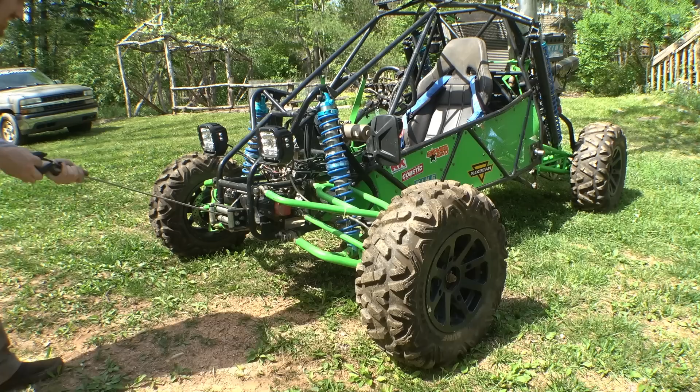Yeah, work smarter, not harder. I'm gonna use the winch to drag this thing out.

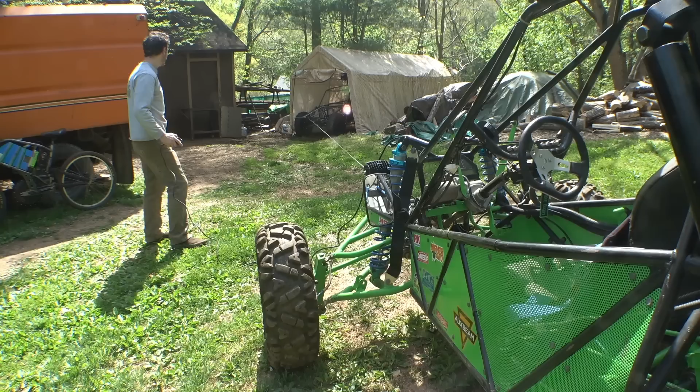Man, look at the size difference between these vehicles. The CBR 1000 isn't that much smaller than the two-seater mini trophy truck. The trophy truck has bigger tires and a bigger frame, but the wheelbase isn't that much bigger than the CBR 1000. I think it's just the bigger tires and bigger frame that make that thing look huge. So finally being able to see these things, not really side by side, but more head to head, I guess.

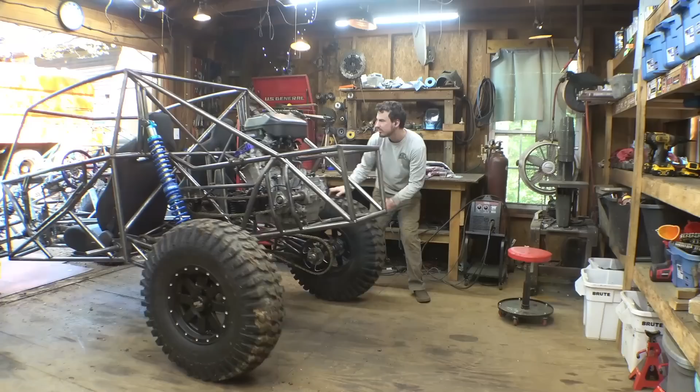Alright, we are finally continuing working on this project. I know we took a little break from this thing for, I think, a little over 2 months. Yeah, we're finally back working on it. Now, I made a list of everything we need to do before we can disassemble this whole frame, weld it all together, then reassemble it and start working on wiring and plumbing and all that fun stuff.

We need to install the radiator, install the bump stops, the dash bar. I want to raise this up a little bit more and move it further forward. Sway bar, secondary sway bar, I'll explain that later. Gas tank, finish cross bracing. I need to add more tubing here and there to strengthen the frame. Dashboard, we need to connect that up. And finish the engine mounts. There's probably a couple other things I'm forgetting.

Now, let's start working on the radiator first and get that installed.

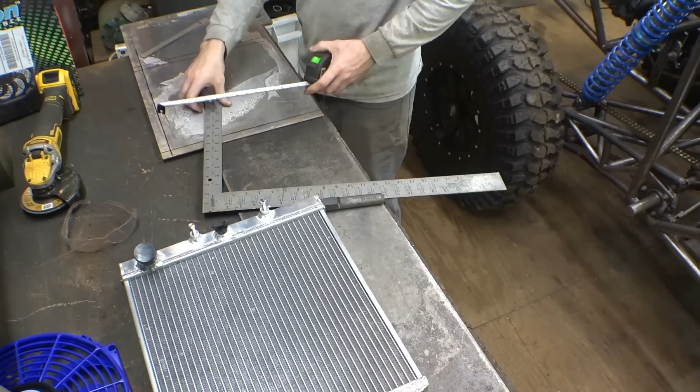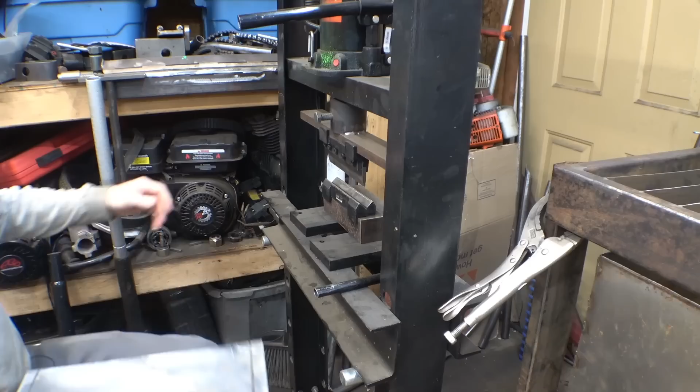Alright, I'm not sure if this is gonna work, but I want to try it. Yeah, it's not that wide, but maybe if I just do it in a couple different sections, maybe I can get this to work.

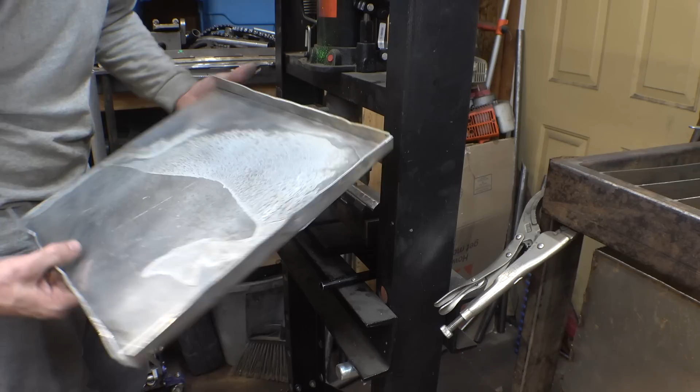Well, it's definitely not the neatest job, but maybe I can clean it up.

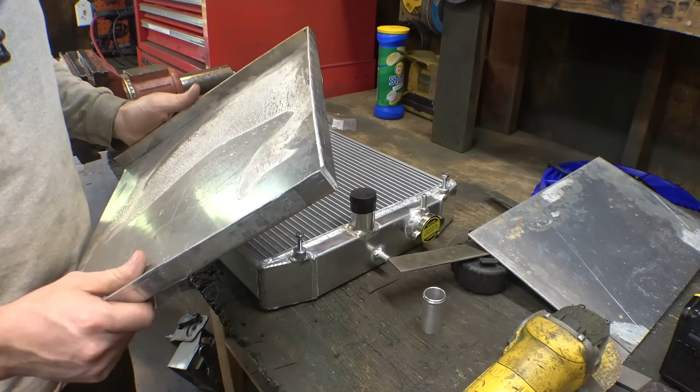So this thing kind of looks like crap. I was able to bend it, but I don't know. I wanted to try and bend it so I didn't have to weld these corners on. Already this piece wasn't big enough to do all 4 corners, so I'm gonna have to weld this side. Also, I made it a little bit too big, my calculations were a little off, and it's about 1/16 of an inch too big on this side.

This side is kind of the worst side, it's really dented in. I'm thinking to fix this maybe I just cut this piece off so I can bring it in just a tiny bit. I already have to weld one side, so I'll just weld 2 sides and get this into shape. Then we got to cut a giant hole in the center of this.

I don't know, part of me just wants to try again and not bend it, just weld it together. Welding is going to be a lot prettier, and it's not gonna have all these ugly, really bad scratch marks on the side. I mean, that looks fun. Should I just start over? It's gonna be on the bottom, so nobody's looking at it, but it just... this looks like crap. Yeah, let's try again, and instead of bending it, I'm just gonna weld it.

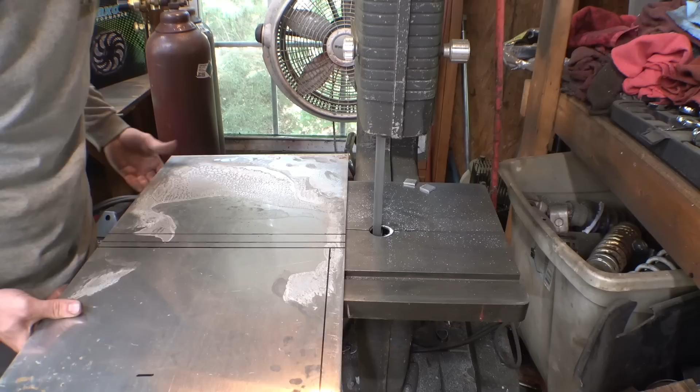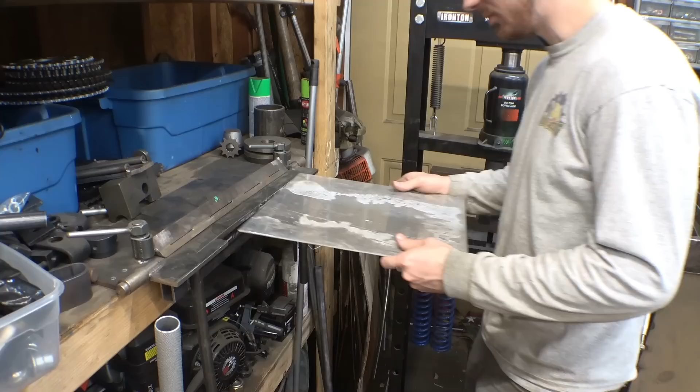Alright, so I scored some lines in here, so hopefully that means I weakened it enough to be able to use this bender that I made that isn't very strong.

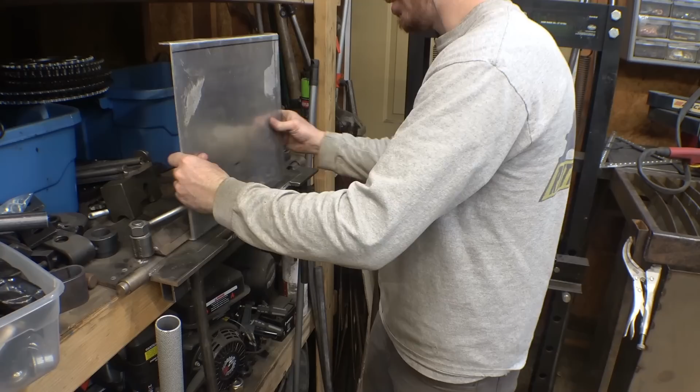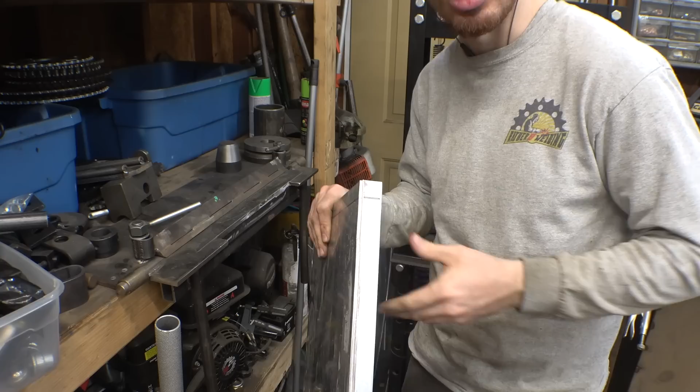Boom! Look at that. I'm still gonna have to weld this because now it's cracked and it's super weak, and any vibration would make this fall off. But it doesn't look too bad.

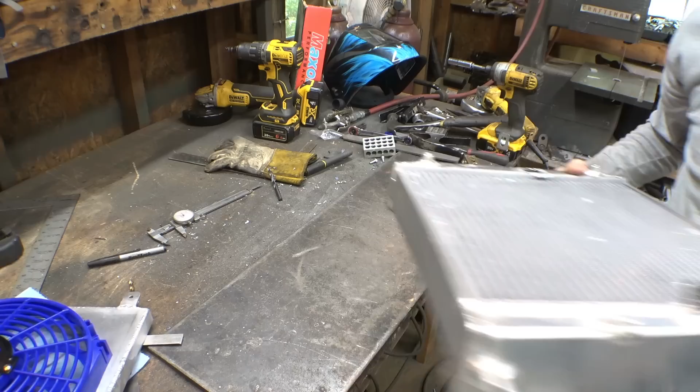Alright, so I had to build a radiator shroud for this. I wanted to try and buy one, but I could not find one that would fit this, that had the holes and the proper spacing, so I decided to make one.

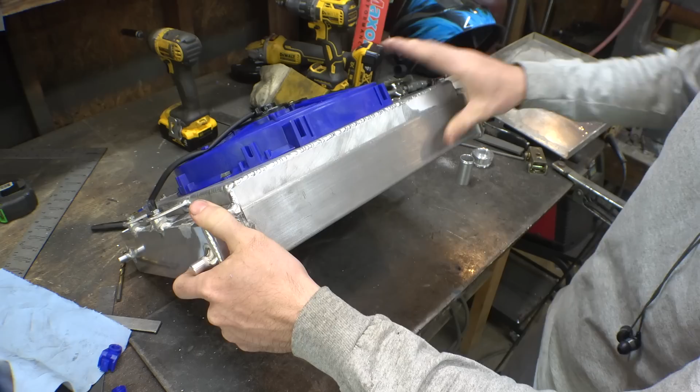Now, look at the girth this thing has. Once we added the shroud and the fan, this thing is really thick, so I'm hoping I can still fit this in the frame now that I added this stuff. Also, this is a triple core radiator, so hopefully we'll have plenty of cooling capacity for this giant engine. I wanted to try and find a really small radiator but still have plenty of cooling capacity, so I found one that is triple core.

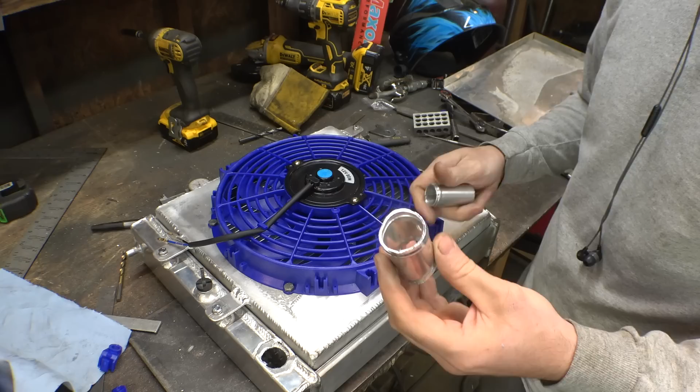Now, yes, I did cut off the original inlet and outlet of this radiator. These are too big, we need to weld on the proper size we need. These are 1 inch, and I believe the original was 1.5 inches, which is too big. Don't need those, we need to weld on the proper size. So once we get this installed in the frame, we'll weld on the new inlet and outlet, as well as relocate the radiator cap.

Okay, this is really uncomfortable. Ouch. Oh man. Ouch.

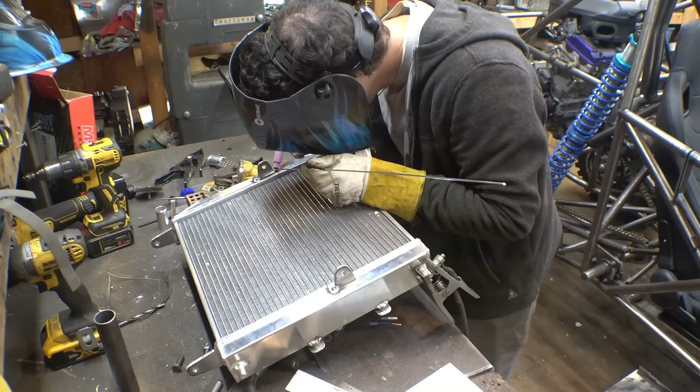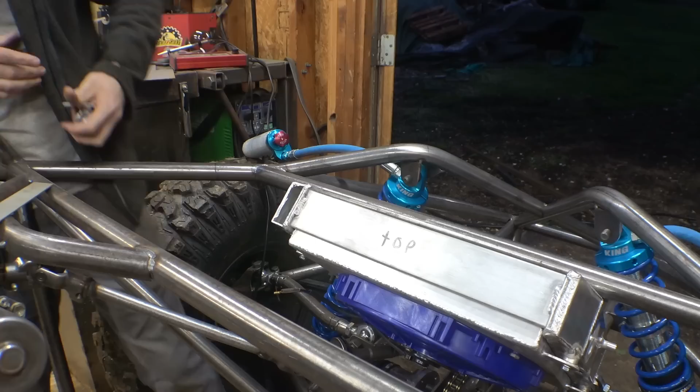Alright, so I cut this hole out on top, so therefore we can mount the filler cap right about there.

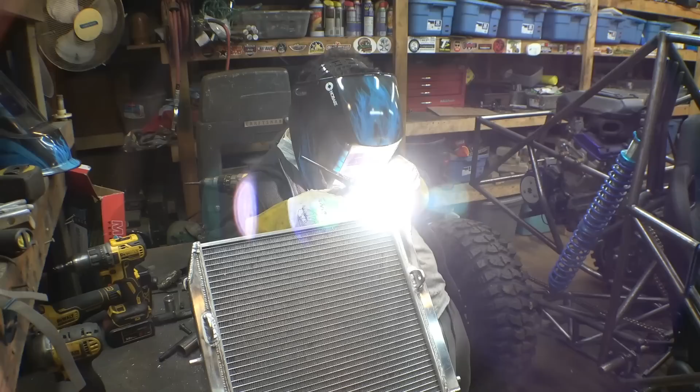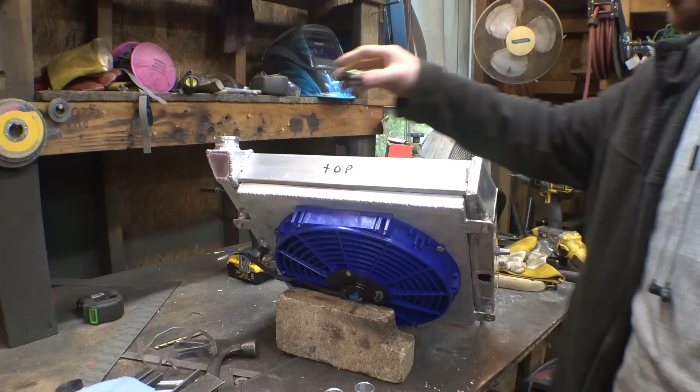Oops. Dang it. Alright, filler cap is done. That's on there. Now we gotta do the inlet and outlet. I just finished machining this one. I had this one from a different project that I didn't use, so I just had to machine another one. So now we have the inlet and outlet.

I'm not sure if I should put them in the original spots of where the original ones were, or should I move them higher or lower? I don't know. I'll figure that out. As well as we have to cap off the original spot where the filler cap was, so we'll cap that off, put these on, and then we gotta pressure test this thing and make sure there's no leaks, and then we should be done with the radiator.

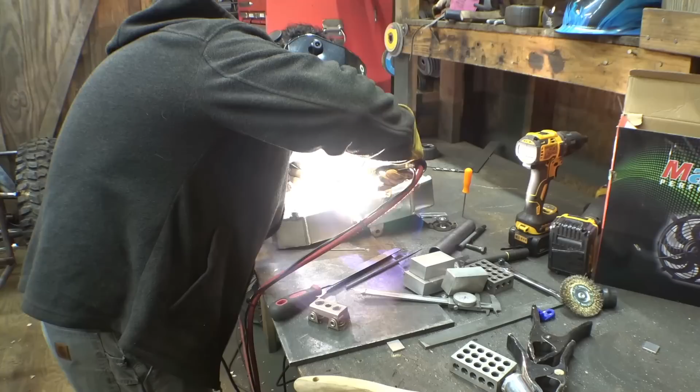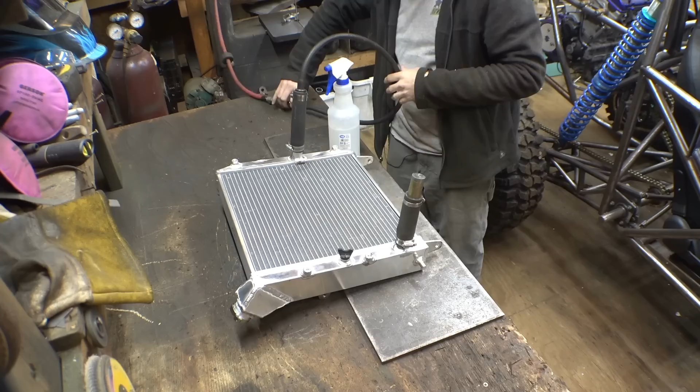Alright, gotta do a leak test on this thing. Now I'm not gonna do full power of the air compressor, which is 150 right now. That's ridiculous. Let's do 50. I'm gonna test it at 50 psi. Well, that wasn't a good noise. Oh, it's the bleeder valve. I was about to say, did it pop already? Let me just hold that with my finger.

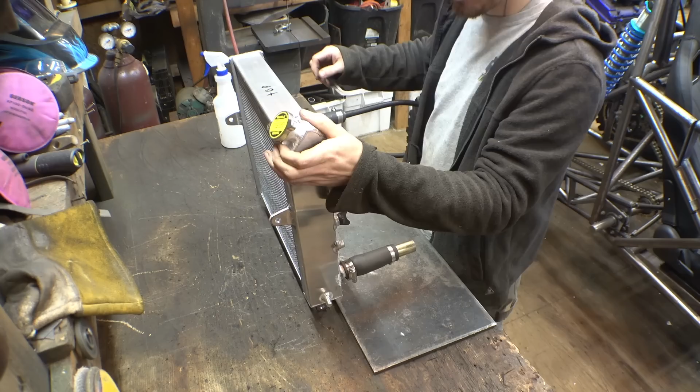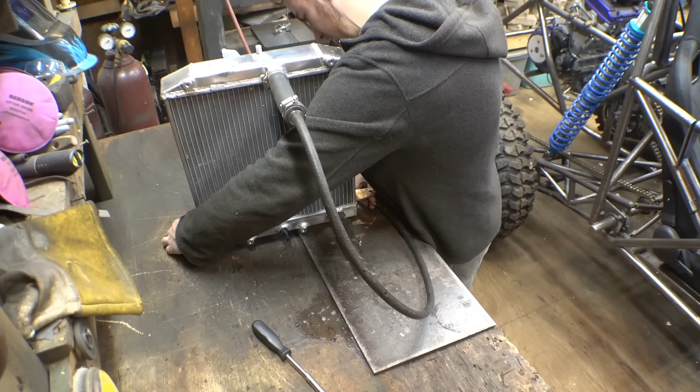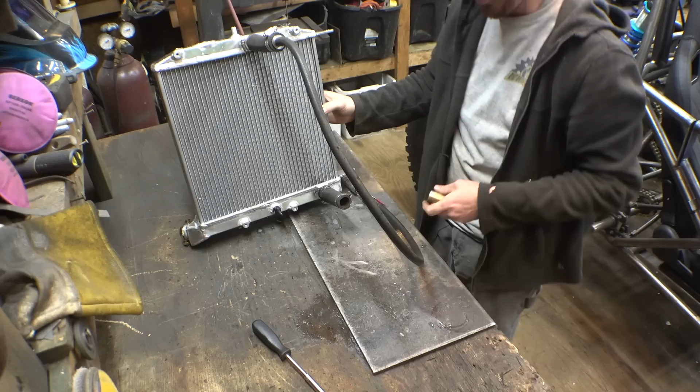Oh, okay, that startled the crap out of me. Yeah, it was just this plug that I had in the hose right here. It just came out. I got my heart going.

Oh man. Yeah, I think it's good. I don't see any leaks aside from this fitting. It's not the weld, it's the hose. It's just leaking, and I just need to tighten it a little bit more. So I think it's good. I didn't see any leaks, which is a miracle, so that's awesome. Dare I say it, I think my aluminum welding is getting better.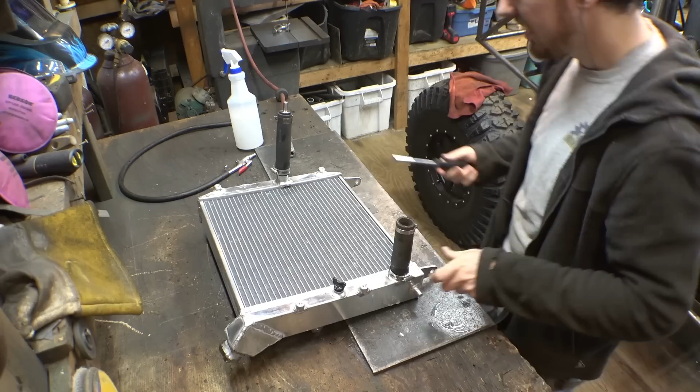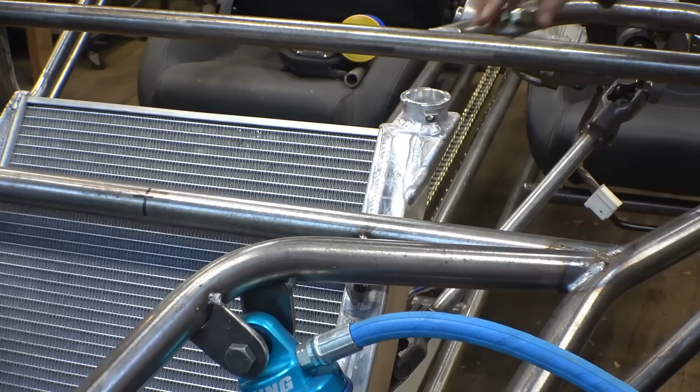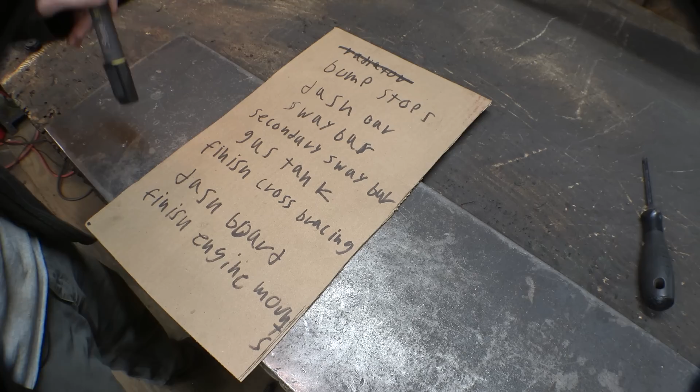Alright, radiator is done. Only took me 3 days to modify this thing, but let's put it back in the frame. Yeah, we're making some progress. We got 3 days of work to cross one thing off our list. Nice. Now, next thing is let's work on the dash bar.

All right, so this bar is what I'm talking about. It's like a dashboard, but it's a bar, so dash bar. Now, I want to redo this. It's a little bit too low. I want to cut this off, make a new one that's a little bit higher, a little bit further forward that way. It's not going to affect my view in front of this vehicle. I'm already putting body paneling over this whole thing, so raising this up is not going to affect that.

But it's going to make it to where I have more room for the instrument cluster. That's going to go right here. I want to have it mounted like right here instead of down here, because I also want to connect these with tubing. I want to connect this up to here.

And to have room for this, it's going to have a bend right about here, so it's going to be a little bit bigger, and I want to have more room for switches and everything, and I want to move it a little bit further forward to have more room for the shifter of the engine, as well as the H-pattern that's going to have to go right here for the secondary transmission. So let's cut this off, raise it up about 2.5, maybe 3 inches, and move it forward about 1.5 or 2 inches, something like that.

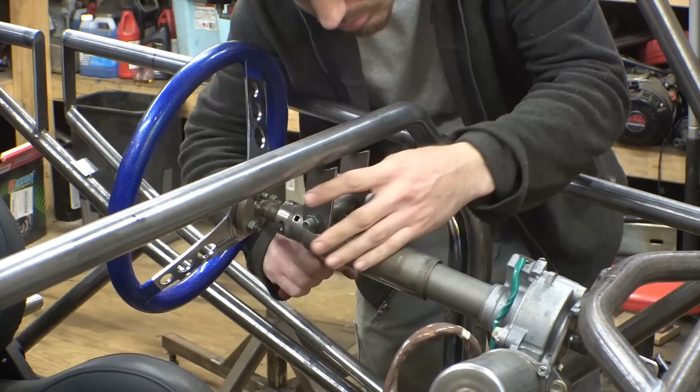Alright, so this is the old one compared to the new one. The new one, we raised it up about 2 inches, as well as brought it forward about 1.5 inches. So I'd say it's perfect.

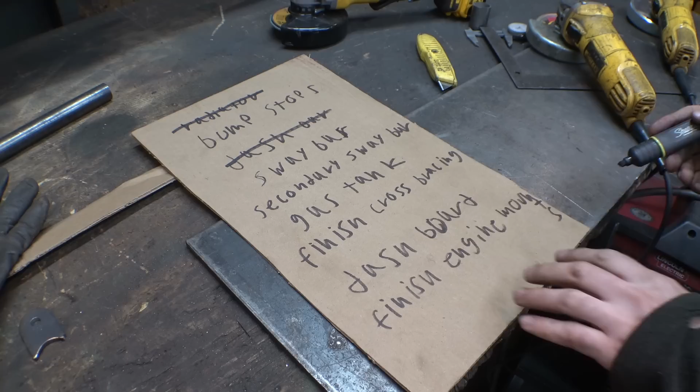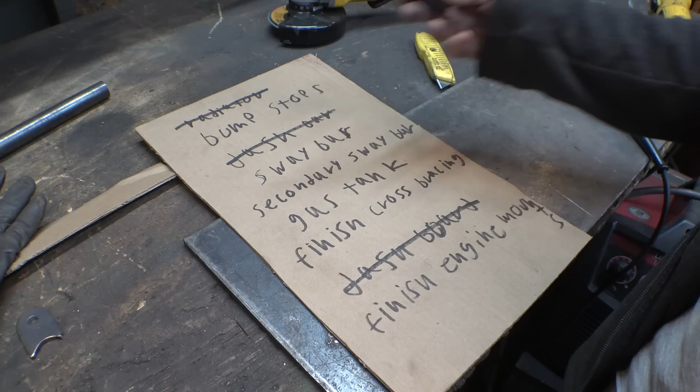Alright, we're knocking some stuff off the list, finally. We got the dash bar done, as well as the radiator. Now, I think next, let's work on the bump stops.

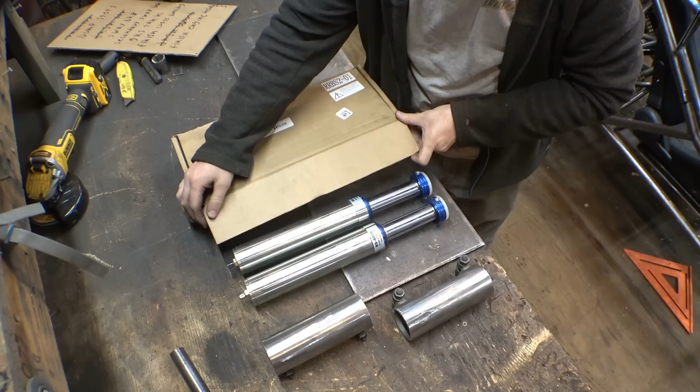Check it out. So these are the bump stops that I bought for this project. These are pneumatic bump stops. All trophy trucks and really good, expensive off-road vehicles use this kind of bump stop, so I really wanted to buy these for this project. Now, these kind of look like Fox and King bump stops, but they're not. They are some other way cheaper brand.

I originally was looking at the price of Fox bump stops, and I'm like, those are pretty much the same price as what I bought the King coilovers for the front suspension. But I found these at like half the price, and they look the same. They probably work the same too.

These are for the front. These have 2 inches of travel, and then these are for the rear. These have 4. We're gonna have to machine a piece of tubing for this to fit into, and then these collars tighten down on it. And then these came with this thing that we weld onto the frame. So yeah, first let's get the rear installed.

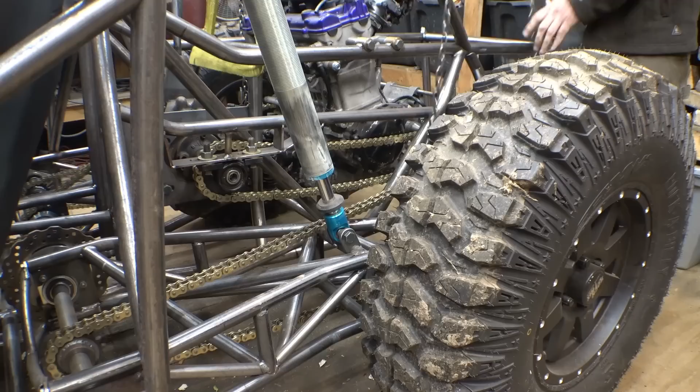So, first thing is we need to figure out exactly where on the trailing arm the bump stop is going to be contacting the trailing arm. I think the best spot is just somewhere right in here. So we need to add a piece of tubing going across here and then add a little metal disc, so therefore the bump stop has something to contact.

And then once we do that, we need to raise the frame 4.5 inches because this has 4 inches of travel, but we want it to where when the bump stop collapses, the shock still has about 1/2 inch before the shock collapses. So we're going to raise the frame 4.5 inches off the ground from the distance where the bump stop's going to be contacting on the trailing arm. That is where the bump stop needs to be mounted, right there.

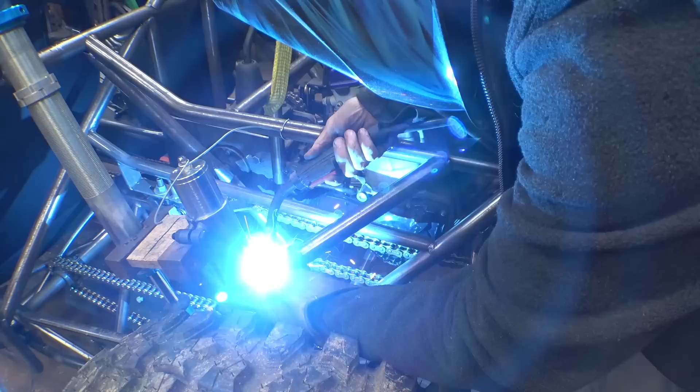Alright, right there is 4.5 inches. So right here is where we need to mount the bump stop, right there. Alright, got both sides put in place. Let's see if it'll hold the weight of this thing.

Well, they're kind of working. To really be able to test these, we got to drive this thing and jump it to really see if these actually make a difference with landing and everything. I'm hoping that we can adjust the stiffness of these by just adjusting the amount of nitrogen these have, because these are probably built for a vehicle that is way heavier than this thing. Yeah, these are nitrogen charged, so I think we can just adjust how stiff they are by adjusting the amount of pressure that these have.

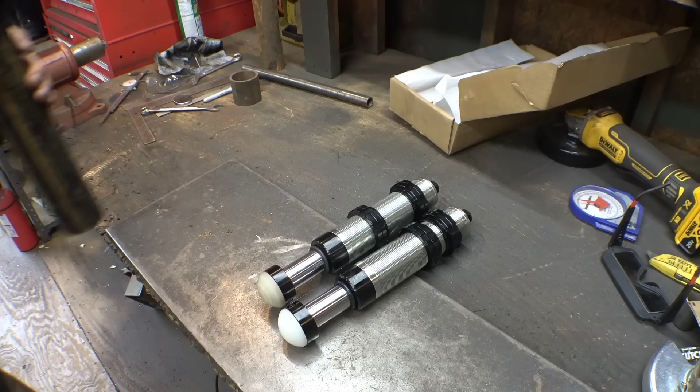Alright, the rear is done. Let's move on to working on the front. Now these are designed to fit inside a pipe, and then you tighten these down, and it's also adjustable, which is kind of cool. So I found this piece of pipe that is almost the perfect size. We are going to have to machine this a little bit to get this to fit on here. We probably only need like two 4-inch sections, then we'll machine it to fit on here, and then we can weld this onto the frame.

Alright, so this is the absolute lowest that the frame can go. Now these only have 2 inches of travel, so once I weld this little metal disc right on here, I'm just going to put it right there. I'll measure the distance between here and here, and then raise the frame up 2.5 inches, and then that is where to mount the bump stop.

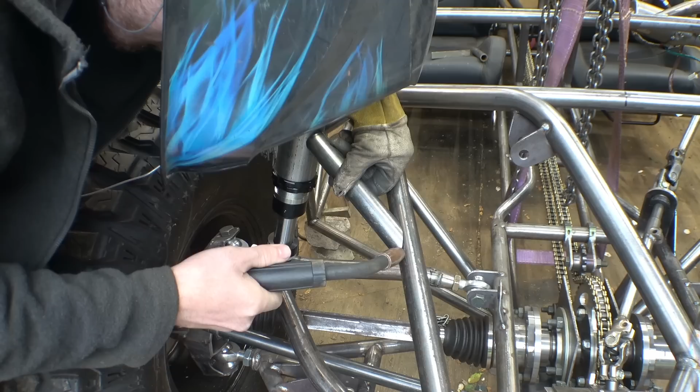Alright, we got both front bump stops in place. We got most of them tacked together. We're going to have to do a bar going from here down to here somewhere, but I'm not sure how we're going to do that because the shock's right here. So let's put the shocks back in place, lift this thing back up, and we'll figure out how to connect down to here.

So I was curious what this looked like, so I took the tire off. Look at that. You can see it's kind of moving. Look at that. It seems to be working.

Now, we're not done with the front bump stops because I don't think just 2 pieces of tubing right here is going to be strong enough to keep this from bending and flexing out of the way when the front suspension hits this. So we need to somehow connect this down to here to strengthen it. Now, pretty much the only spot that I can add tubing is right here. Can you guys see that?

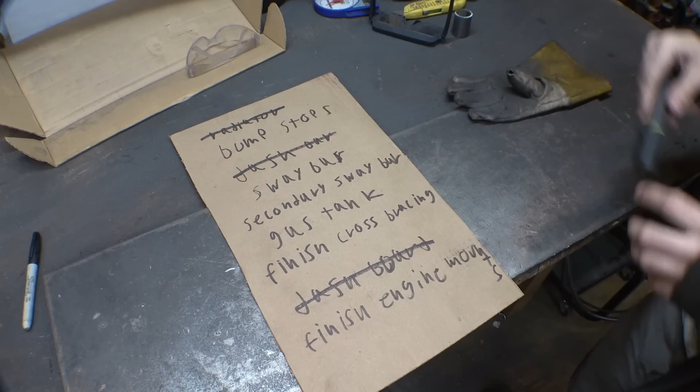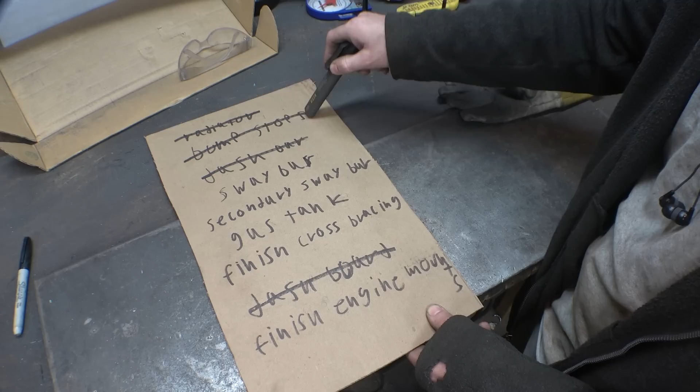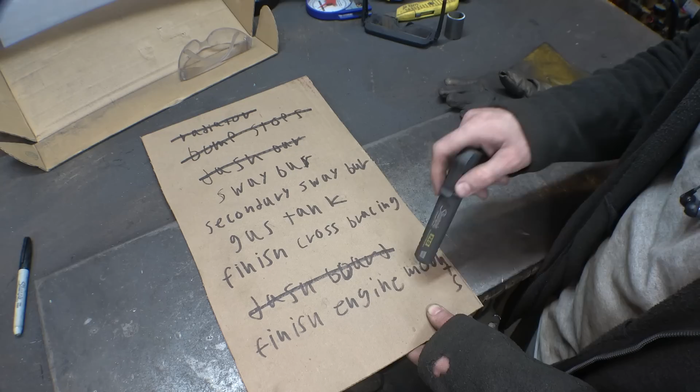So we got 4 of the 9 things on this list done. We got the radiator installed, we got the bump stops installed, we got the dash bar, dashboard. These 2 were pretty easy. So next we have sway bar, secondary sway bar, gas tank, finish cross bracing, as well as finish engine mounts. These 2 are probably going to take the longest. Making a gas tank always kind of takes a long time, as well as finishing the cross bracing.

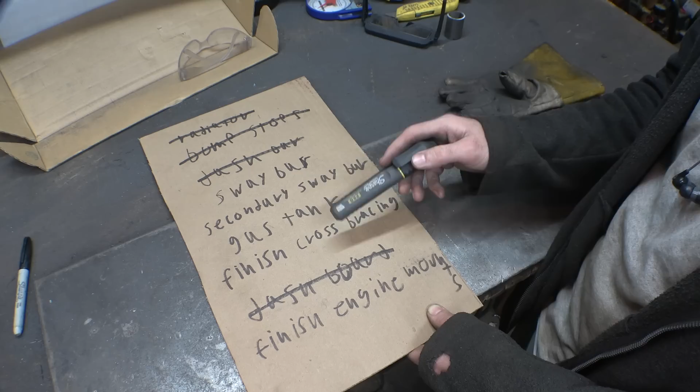There's a lot more tubing I want to add to this frame, so these are probably going to take a little bit of time. So now we're going to try and finish this list in the next video of this project, so that the video after that we can fully weld the frame together and finally finish the frame. But yeah, we'll do that in the next video of this project.